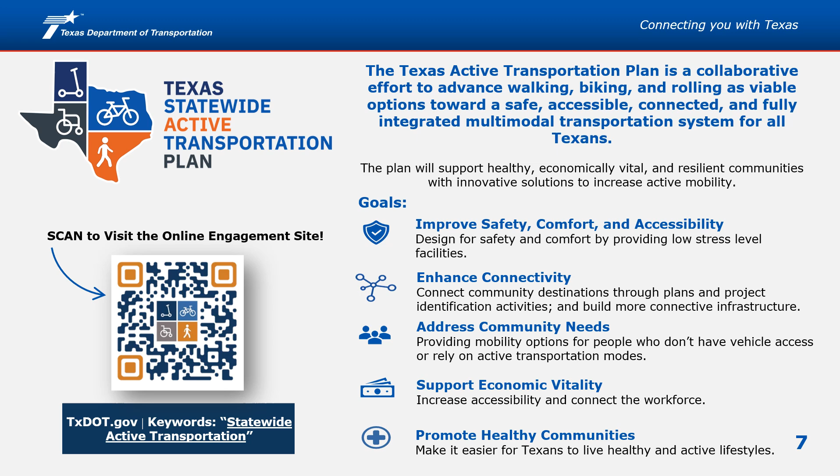TxDOT also started a statewide multimodal transit plan. In response to high level of interest from the public, TxDOT is working on a Texas SMTP 2050 to make sure transit continues to help Texans thrive now and in the future. This plan, in addition to the statewide active transportation plan, aligns with TxDOT's Connecting Texas 2050 plan. To be involved in this effort, visit TxDOT.gov with keyword search SMTP.

TxDOT San Antonio District participated in the first round of pilot programs to develop a district bicycle plan. The bicycle plan analyzed biking needs on system routes, prioritized locations, and recommended bikeway functions. Bicycle trails tourism routes were also refined. The completed plan includes an interactive map that showcases all key findings. Visit TxDOT.gov with keyword search District Bicycle Plan Pilot to view the completed plan.

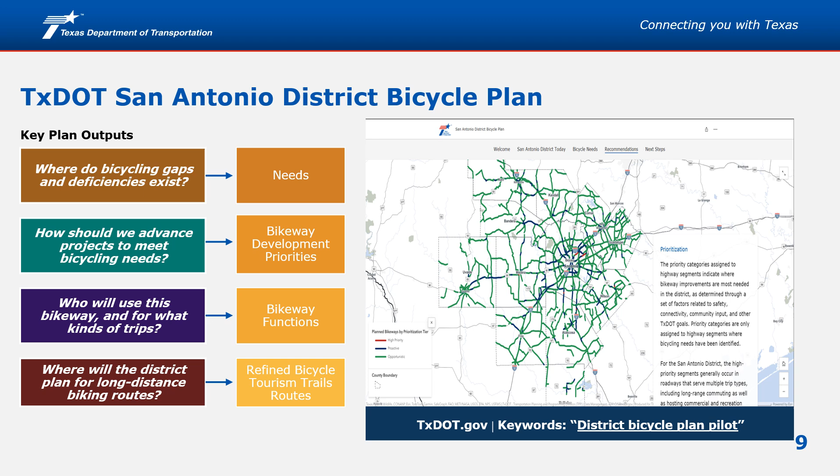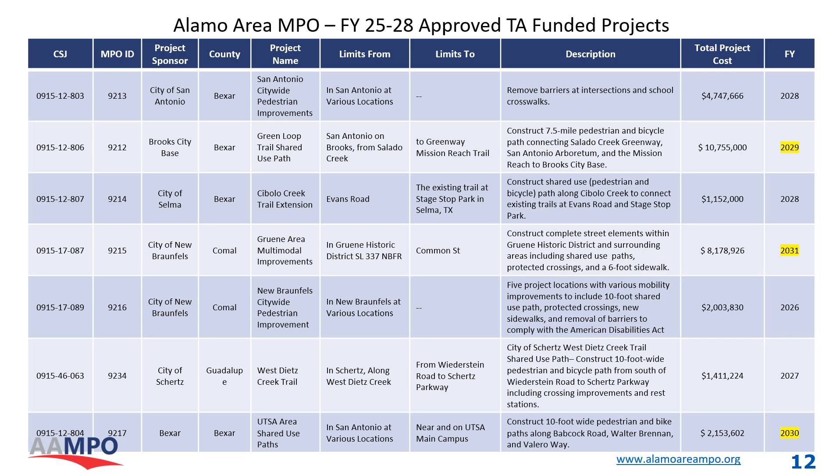Here is a map showing AAMPO's 2025 through 2028 TA awarded projects.

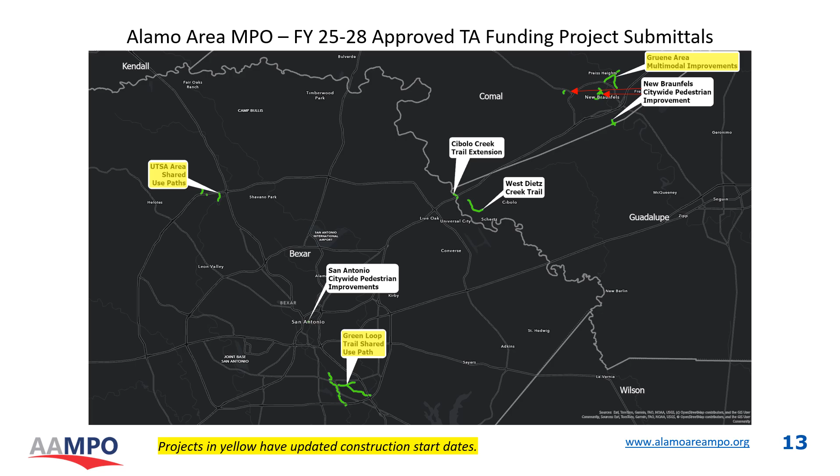The San Antonio District has 2 interactive maps available with updates on bicycle accommodation projects. Please view the 2 interactive maps of bike accommodation projects coming to your area. In the first interactive map, you'll be able to view recently completed and under construction bike accommodation projects. In the second interactive map, you'll be able to view upcoming bike accommodation projects.

The next slides present projects with bicycle lanes that have been specifically included in this public hearing to garner public comments. Please note the plans for these projects may be subject to change since they are still being designed. These projects will proceed to final design, letting, and construction following the public hearing comment period and environmental clearance. The formal comment period will close May 15, 2025.

City of Selma is proposing to construct a shared use path and bike lanes on Lookout Road from 0.3 miles northeast of Loop 1604 to Evans Road. Estimated construction cost is $5 million, and construction is anticipated to start in summer 2025.

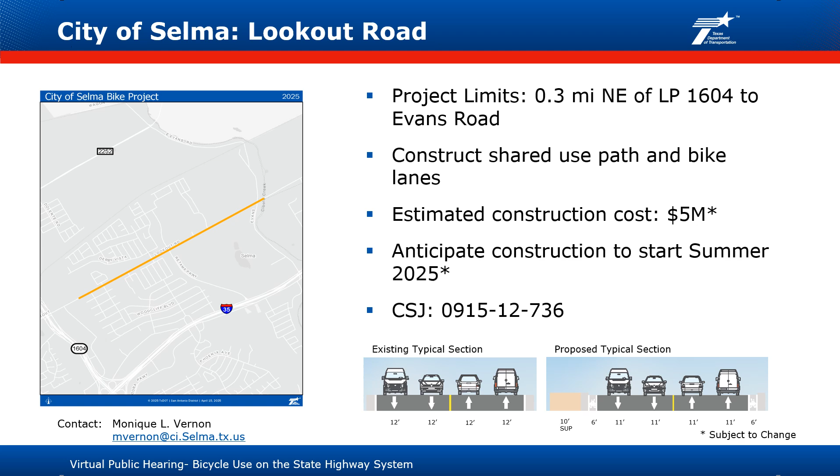City of San Antonio is proposing to improve Frio Street from West Houston Street to IH-10 with construction of bike lane or cycle track, sidewalks, and enhanced pedestrian connection between Neighborhood and Centro Plaza. Estimated construction cost is $6.7 million, and construction is anticipated to start in spring 2026.

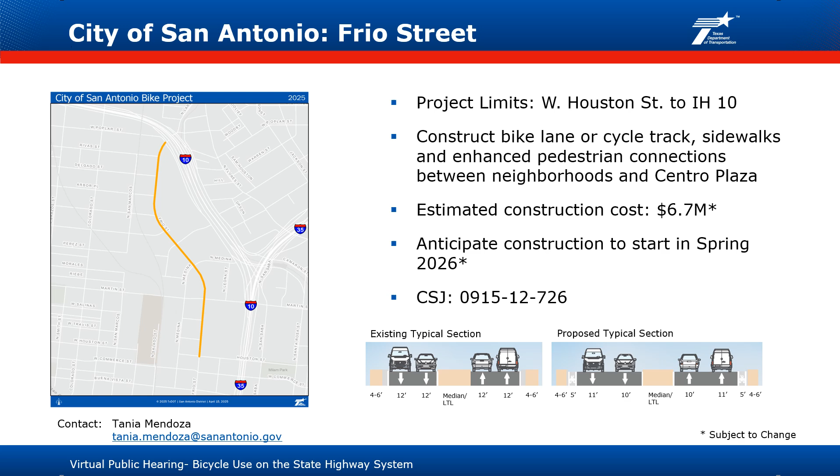City of San Antonio is proposing improvements on Market Street, Dolorosa, and Commerce from Flores Street to IH-37. Improvements include constructing two-way separated bike lanes and upgrading traffic signals, bicycle and pedestrian safety lighting, signage, and pavement markings. Estimated construction cost is $12 million, and construction is anticipated to start in summer 2026.

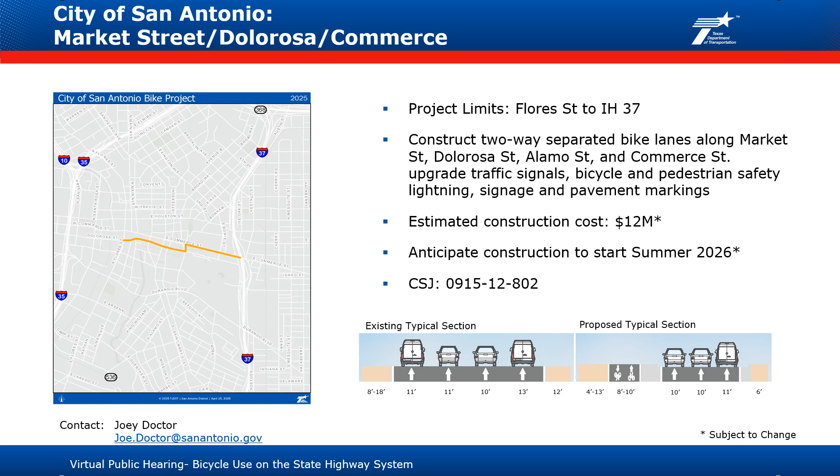Bexar County is proposing to improve Blanco Road from Borgfeld to the Bexar and Comal County line. The improvements include expanding from 2 to 4 lane divided roadway with raised median, bike lanes, sidewalks, curb and drainage. Estimated construction cost is $22 million, and construction is anticipated to start fall 2025.

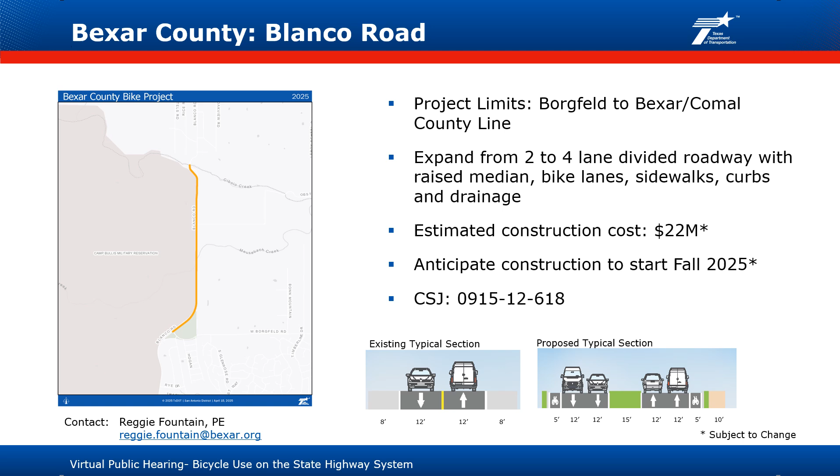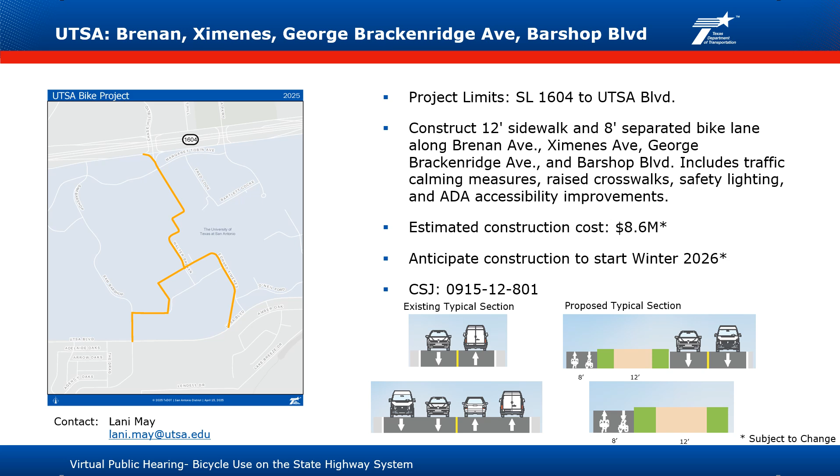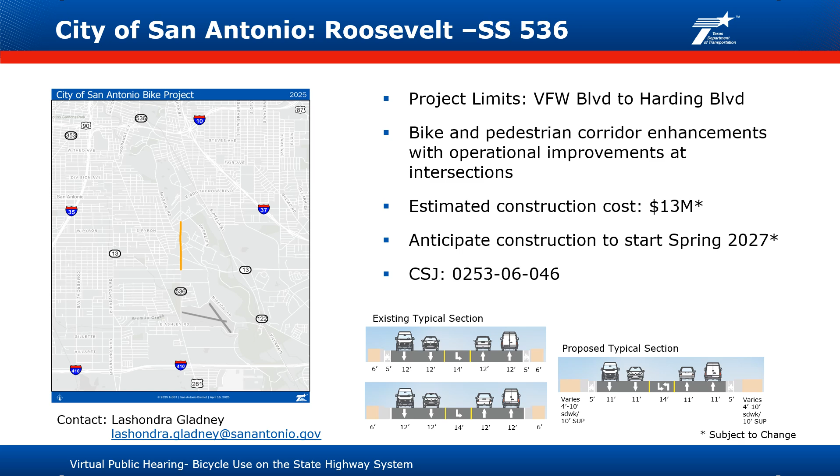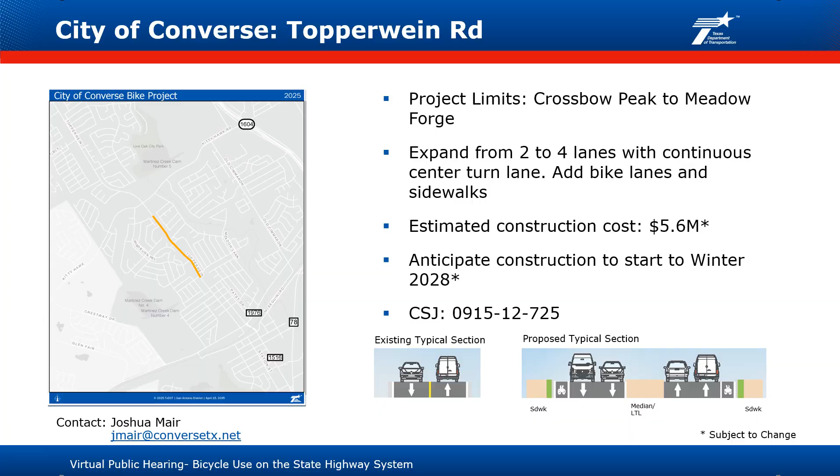To leave a comment, you can download a comment card online and send it by email or mail. You can leave a recorded voicemail by calling 210-331-7930. You can also write an email or send mail to the address indicated above.

The last day to provide comments is May 15, 2025. All comments received will be included in a public hearing summary report and uploaded online to TxDOT.gov. To view the public hearing summary report, search TxDOT San Antonio District Bike Public Hearing.